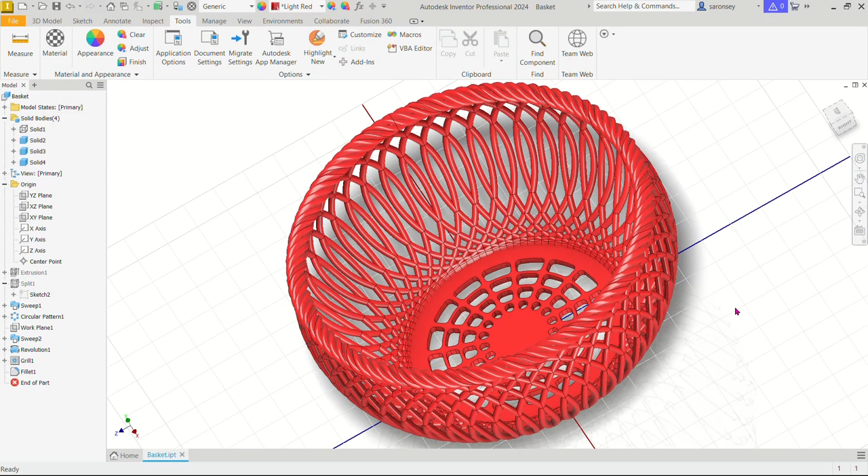Let's jump into today's exercise. Let's get a worksheet to begin. New, and then under parts, create 2D and 3D objects, we will select the standard millimeter IPT template under the metric template because this is more like a part, and create.

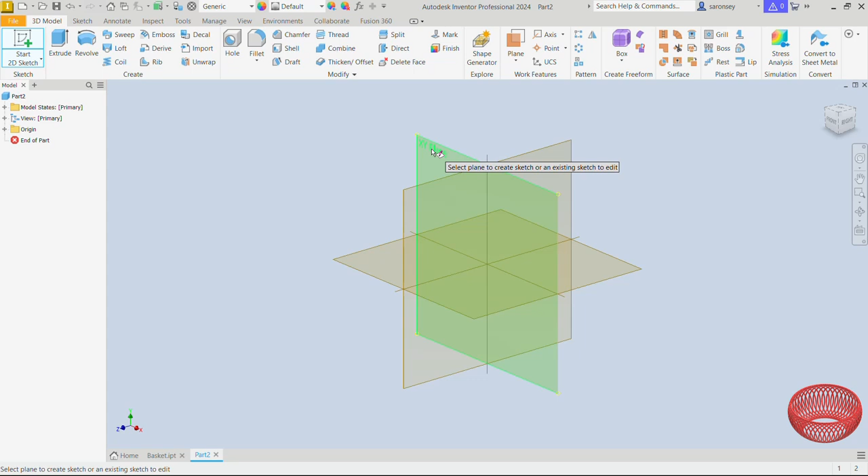Now we pick the 2D sketch command. Let's create the sketch on the XY plane. Let's pick the circle command after that, bring that to the origin and draw a circle. We will dimension this straight away, and so the diameter of this circle is 100. Type that and press enter. Double click the scroll mouse button to get your work in focus.

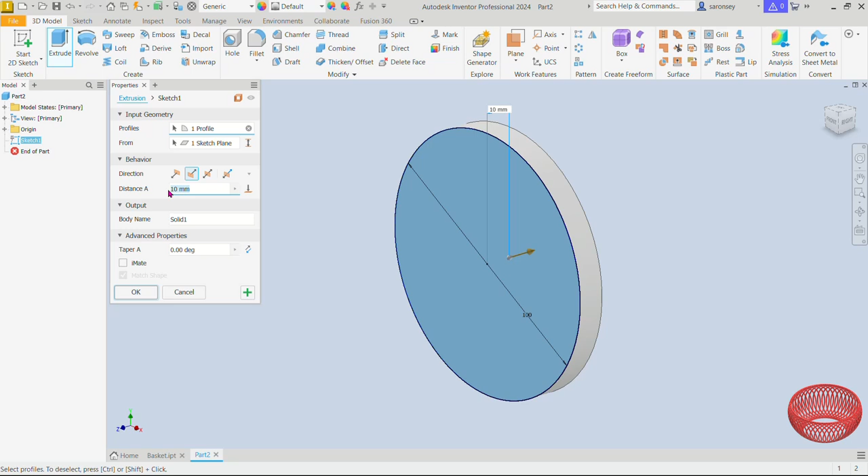Now we can finish the sketch. Let's extrude now. The profile has been correctly selected since there is just one closed profile. The direction of extrusion is what we'll change here to the flipped direction, and change the distance from 10 to 200. The preview is fine, so we can OK. Now let me drag this in position and double click the scroll mouse button.

Let's look for a plane to work on now. So we open up the default planes and then pick the YZ plane and create a sketch on it by clicking on this icon. You can pan to the left to get your work in focus. But we don't see the plane, it is hidden inside this body, so we choose the option that says slice graphics.

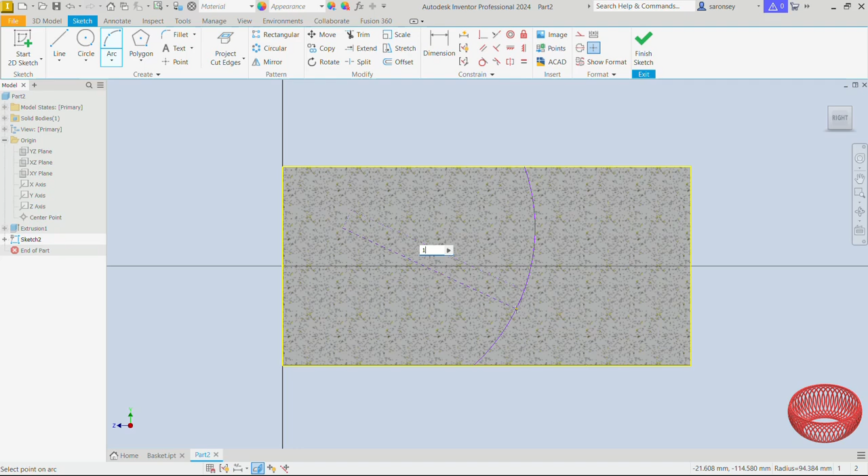Now let's project. So the project geometry command, drop it down and choose the option that says project cut edges. Now we will pick the arc command. Let's draw an arc anywhere here from this horizontal line to this horizontal line as well, making sure you slant it a little. We will give that a radius of 150.

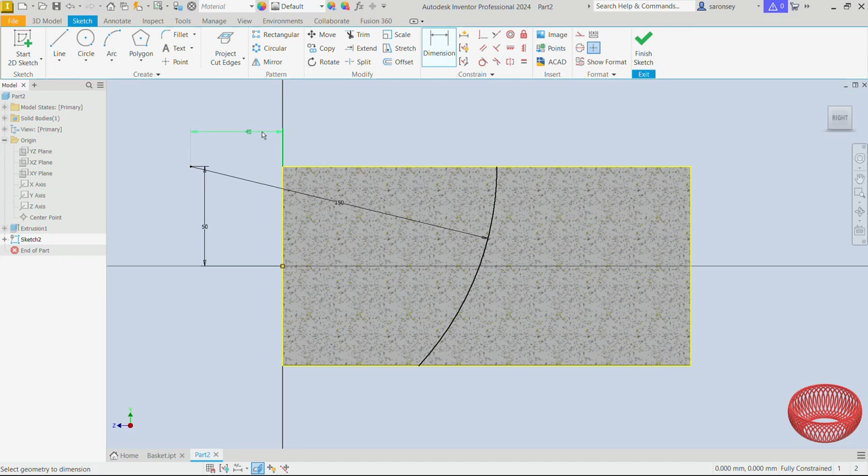You can type that straight away and enter. Now we can dimension. The distance between the point here that makes the radius of the arc and the origin is 50. And then also between that same point and this vertical line is 45. Press enter and then finish the sketch.

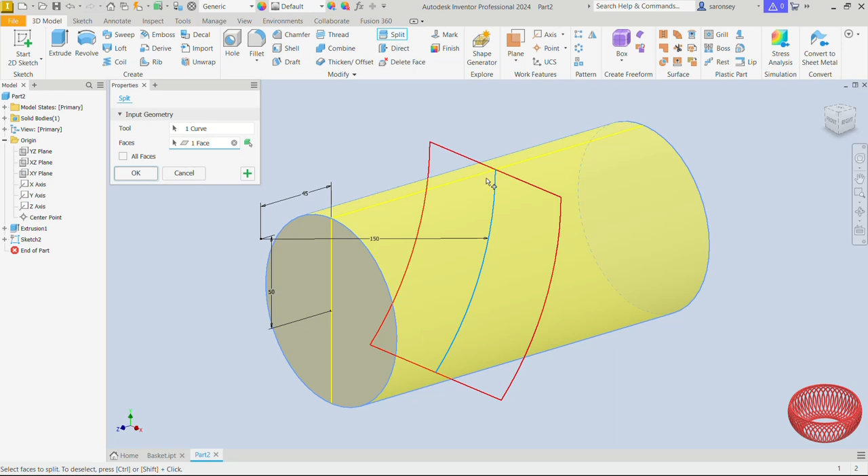Now we would use the split command. There it is under the modify group, it says split, let's select that. Now we need a splitting tool, that is the arc we drew, so let's look for it here. There it is, I'll click on that. And then the face I also want to split along is going to be this extrusion I did. I see a preview right here, which is fine, so we can OK.

Now let's introduce the YZ plane again, there it is, and create a sketch on that. Let me choose the slice graphics option and even project, so drop down the project cut edges here and choose the project geometry command. The arc I created, there it is here, I'll click on that. You can right click and then OK.

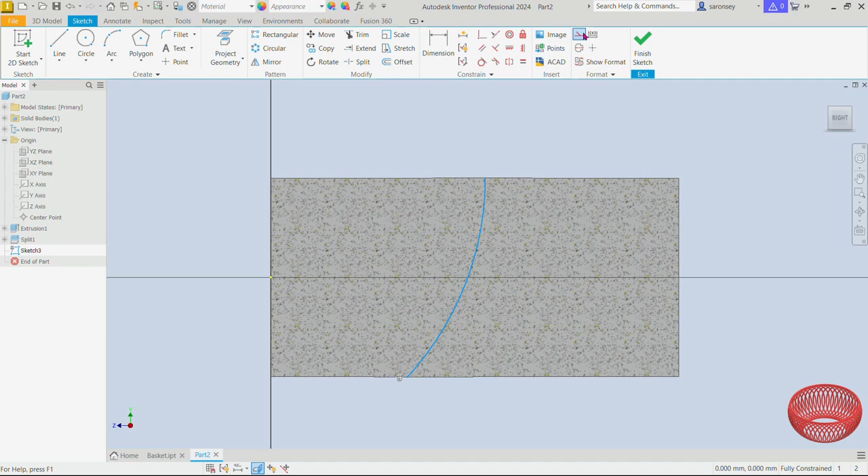Now let's select this arc and make it constructional. We will then pick the circle command. Let's draw a circle right here at the point where we began drawing the arc. The diameter of this circle is 4, and we would enter that. Now we can finish the sketch.

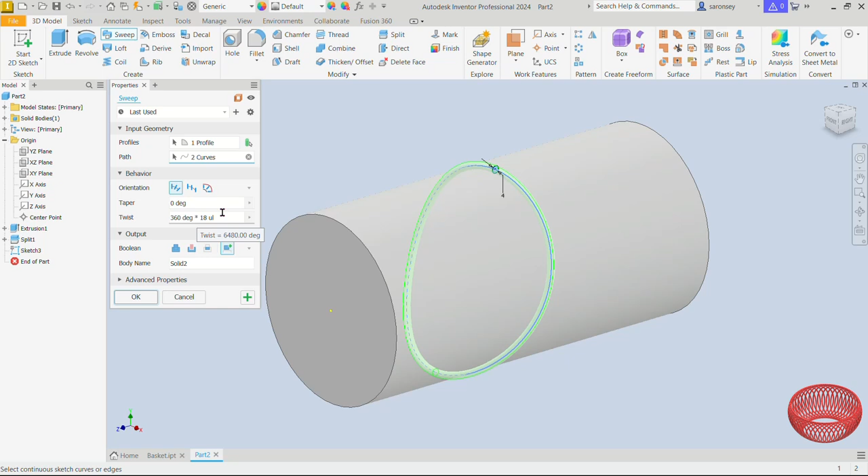We will then use the sweep command. The profile to sweep has been correctly selected. We have to pick the path now, which is going to be this path and then that one. Choose the boolean and make sure you have it at the last one that says new solid. For the twist, it can be 360 by 18. It doesn't make any difference anyway, but you can keep it as it is here, and we would OK.

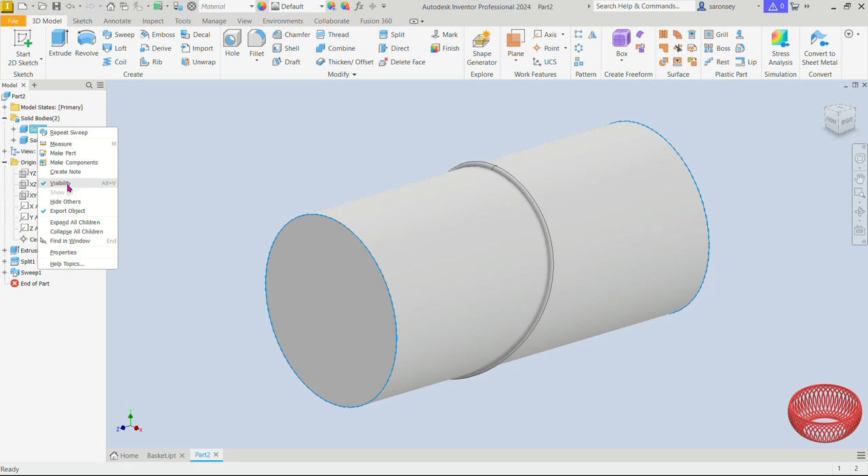Okay, so we needed this extrusion, the very first one we did, just so we could create this sweep profile, and so we can hide it now. Let's look for it here under solid bodies, just open that up. We see the solid body 1 and the solid body 2. So for the solid body 1, just click on it, right click and turn off the visibility. Now we have just the solid body 2.

From here, we would create a circular pattern. Let's pick that command up here and choose the second option that says pattern solid, because it is a solid we want to pattern.

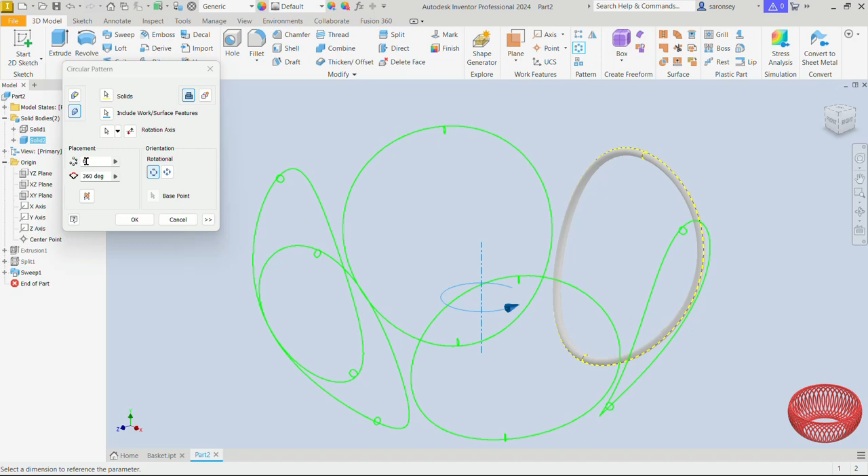The rotational axis, we can drop down this option and choose the Y-axis. We see a preview of that, but that is just 6 of that body. We want about 49 of them, so you type that in here. We can see a preview of that.

The occurrence angle is going to be 360 degrees, which is fine. You can OK this, but it may take a little while, so be patient with it. Okay, so there we have it, neatly done.

The main body of this basket is done. This is solid body 2. We want to hide this solid body so we can continue and create the top part.

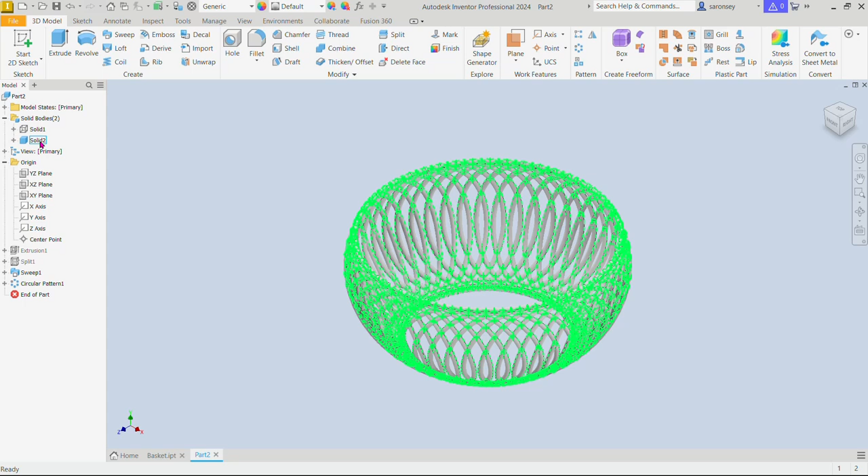Now let's look for solid body 2 - the first one was the extrusion we did, so this is solid body 2. Click on it, right click, and turn off visibility so we have nothing in here.

Now let's open up this split. Click on the plus sign next to it for the Sketch2. Right click on that and let's turn on the visibility. Okay, now we want to place a plane, so we pick the plane command.

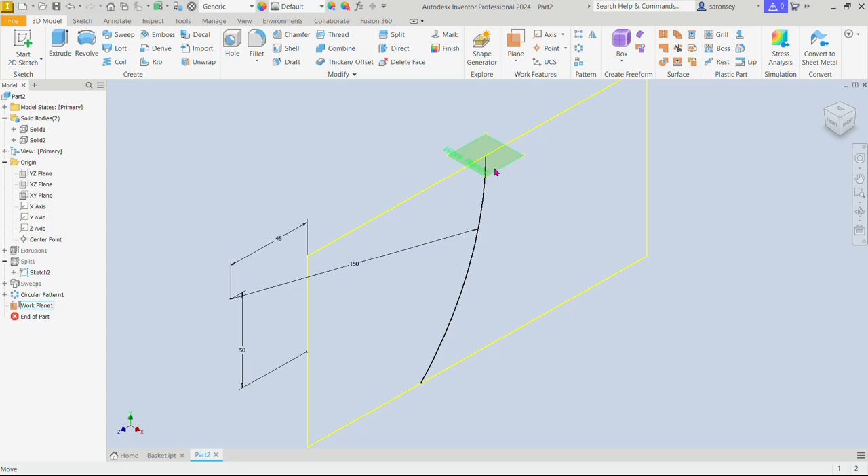The plane is with reference to this very arc, and then we will click on this point. Now let's choose this plane we just placed and create a sketch on that plane. Let me get the isometric view.

Now we want to project a point onto that plane, so pick the project geometry command. Let's project this very point right here. We see it in green. Now we want to pick the circle command.

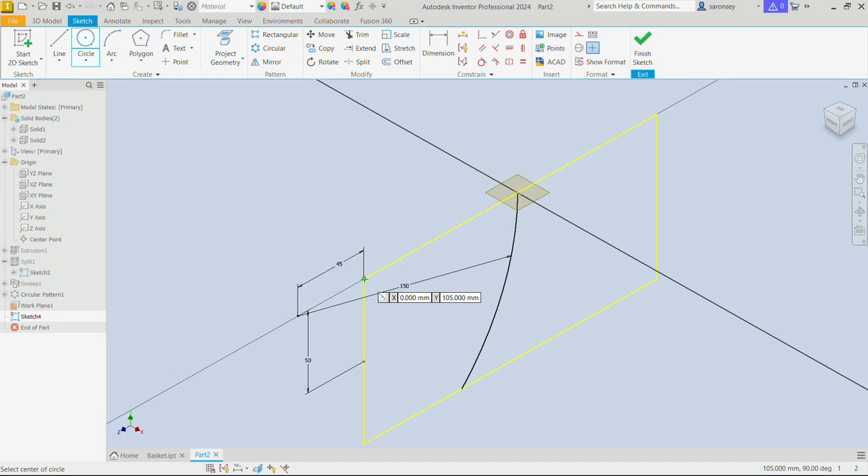Let's begin to draw a circle from this point here. You know you are there when it turns green, so just click and drag and then lock onto the point we introduced onto that plane. Let's click - you can now right click and then OK.

For this plane, let's click on that and then we'll turn off the visibility. Now we can finish this sketch.

Let's introduce another plane again into the YZ plane, and create a sketch on that. But we also want to project this point onto the YZ plane we just introduced, so I will click there. There we see it right here, very little.

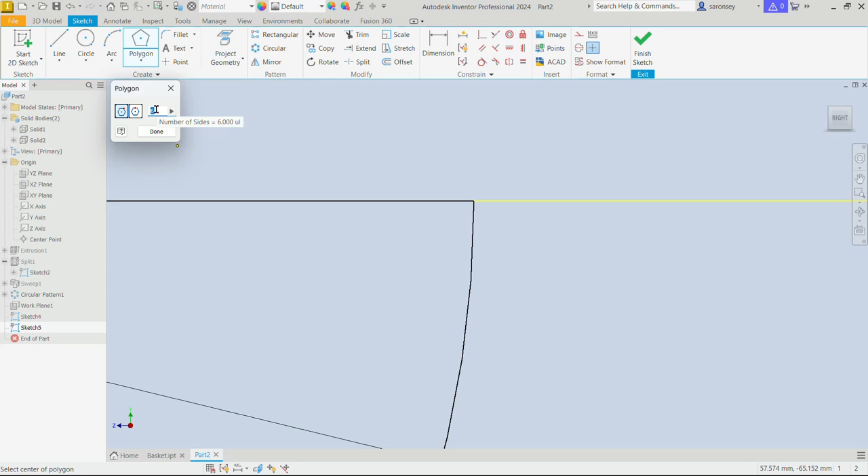Now let's pick the polygon, which is under the rectangle. If you have rectangle here, that's fine - just come down and choose polygon. We want the polygon to be inscribed and the size to be 6-sided, so just type that in here. From this point, let's draw a polygon.

Great, now we will dimension this polygon. The distance between this point here and this line is 7. Let me zoom in a little, and then we would make horizontal.

Just pick the horizontal constraints command. Depending on this orientation, we have to pick that and apply it to this line to make it horizontal. You can right click and then OK.

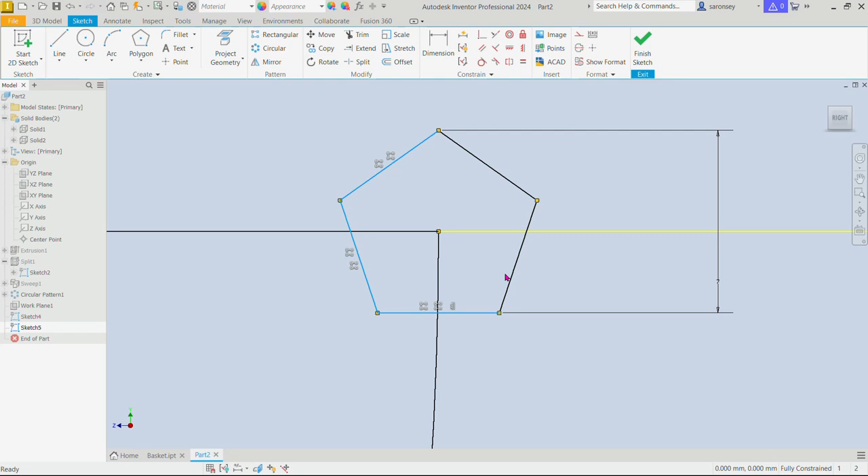Now let's select this polygon - click on the first line, hold down the control key, and select all other 4 lines that make up the polygon and make them constructional.

Now we'll pick the circle command. From this very point here, let's draw a circle of diameter 4.5. Let's enter that, and we also want to pattern this circle. Before that, just right click and then OK.

Now let's create a circular pattern of this circle, so we will pick the circular pattern command up here. The geometry is going to be the circle we just drew, and the axis we want it to go around - we can use this point here, but we see a number of previews.

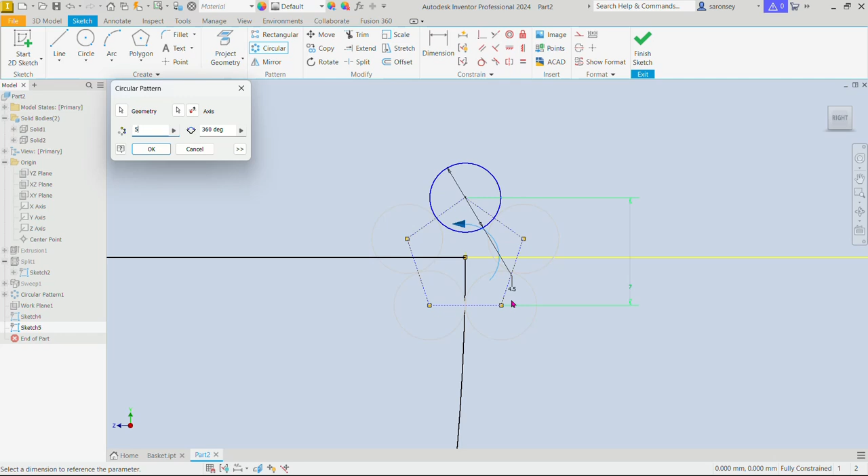There are about 6 of them, which isn't what we want. We want just 5, so that each one is at the 5 corners of the polygon. The angle it should go around, 360, is fine, and so we can OK.

Now this sketch is done. Let's finish it, and we would use the sweep command again, so sweep. Let's select the profiles we want to sweep.

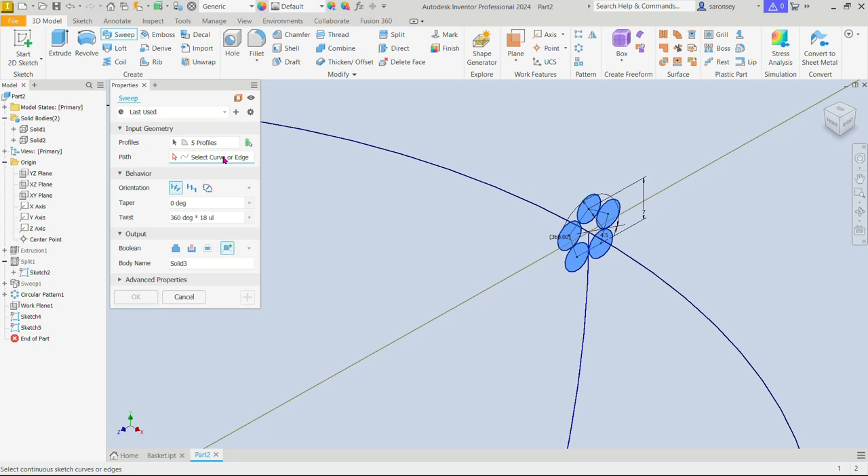It's going to be the circle, all 5 circles we created the circular pattern for. And then for the path it should go around is going to be the circle we drew. This may take a little while, just hold on. The taper is going to be 0.

The twist, make sure you keep it at 360 multiplied by 18. And then for the boolean, also let's make that a new body, so you pick the last option here.

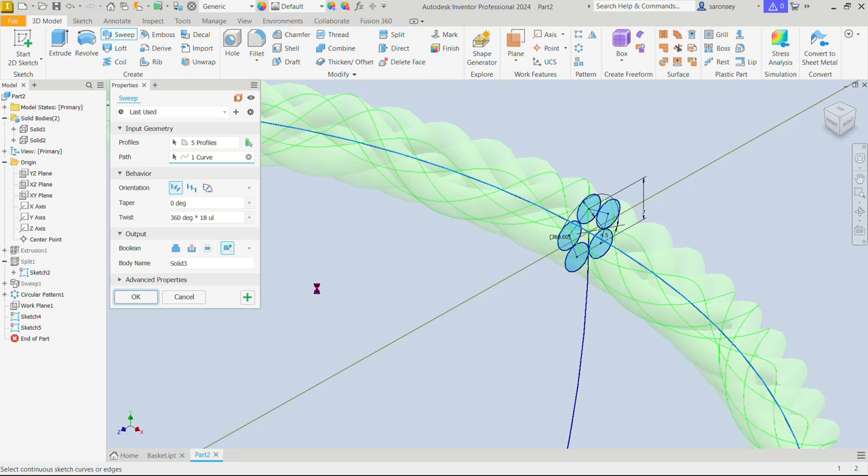That is going to make it solid body 3. And we can OK - just have some patience, this may take a little while.

Okay, that has been done. Double click the scroll mouse button. Awesome.

Now let me give you a clear picture of what we've done. We can turn back on the visibility of the solid body 2. Okay, so there it is. We've created these two, but they are separate bodies.

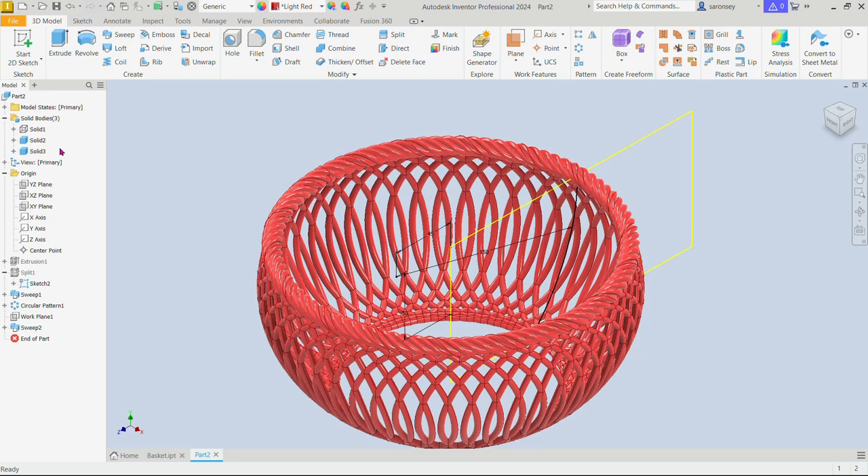Let's go ahead and create the base. For that, I'll turn off the visibility of the solid body 2 and also do the same for the solid body 3 we just created. Now let's get a plane to work on. So the YZ plane, I would create a sketch on that. Let me pan into the middle.

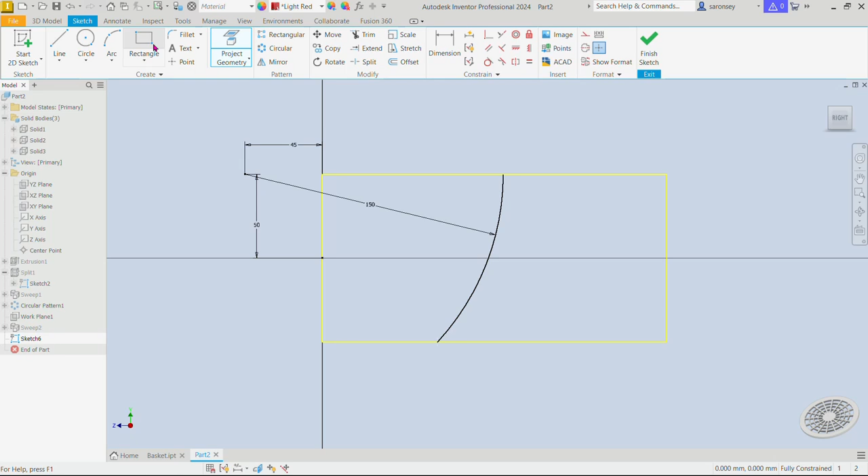Now let's project this very point here onto the plane we just introduced. I would pick the rectangle command. From that point, let me draw a rectangle and dimension it. The distance between these two horizontal lines that form the rectangle is 4. I would enter that, and then apply a vertical relationship between this point and this point here that fully constrains the rectangle. You can right click and then OK.

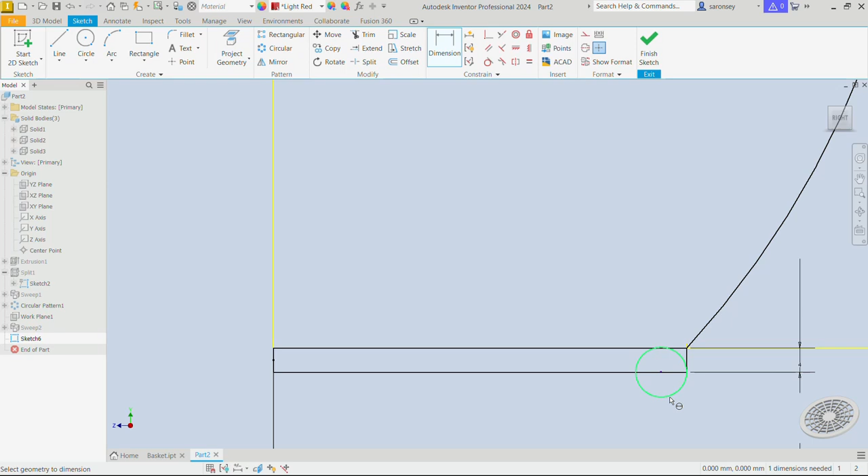Now we would pick the circle command. Let's draw a circle from this point and lock it here, but we would also dimension the diameter of this circle as 4. All right, now let's trim.

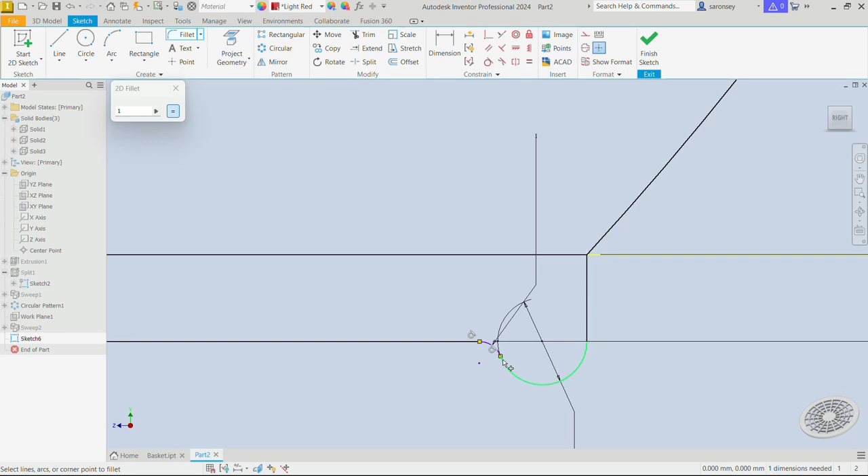With the trim command, we want to take off this part and also this part as well, and apply a fillet. The fillet radius is going to be 1 between this vertical line and the half circle. Let's close this now and also apply a coincident relationship between this line and this point here. That fully constrains that part of the sketch. So we can finish it.

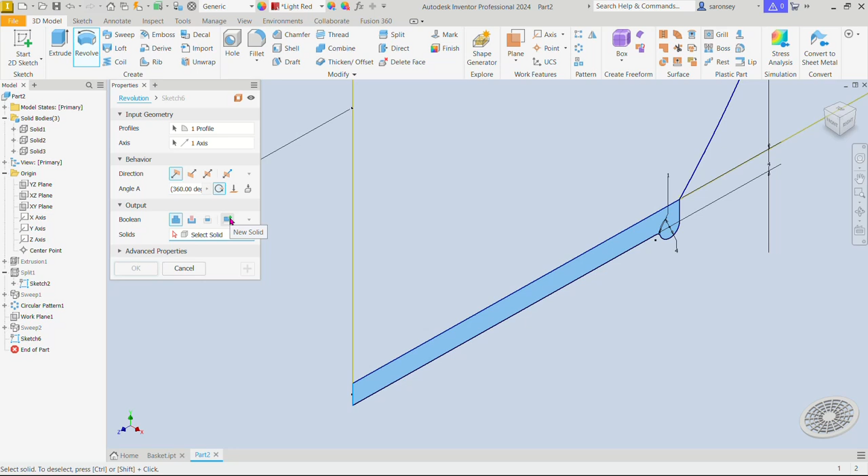What we want to do is revolve. With the revolve command, the profile is going to be this one. And for the axis we want to go around, it is going to be this axis. Let's also make the boolean a new solid body, and we see a preview, so we click OK.

Okay, I changed the color to red. Let me drop this down and even do the default color. We will change the color totally after we are done, so do the clear override. Okay.

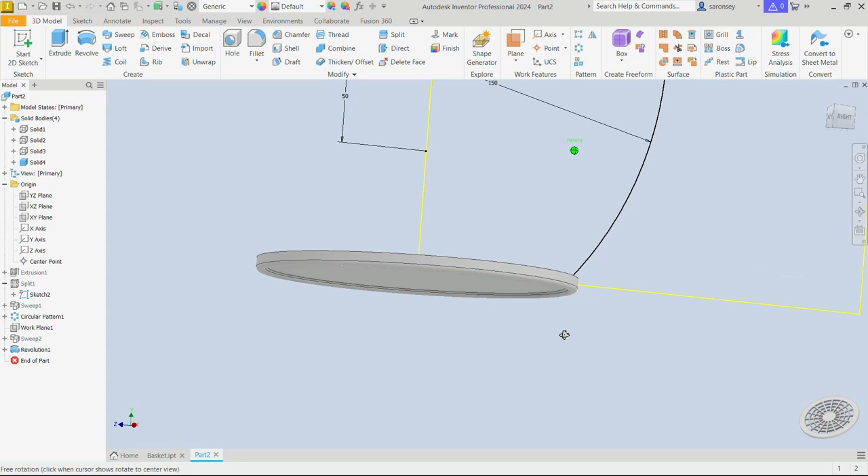So this is how it's going to look like. All right, let me get the isometric view. We are done with the use of this sketch, so let's look for that. It is here under split. You open that up, look for sketch 2, click on it, right click, and then you can turn off the visibility. Now we deal with this solid body.

So let's select this face and create a sketch on it. Now we want to pick the circle command and bring that to the origin. We'll click and drag and draw a circle of diameter 30, and enter that.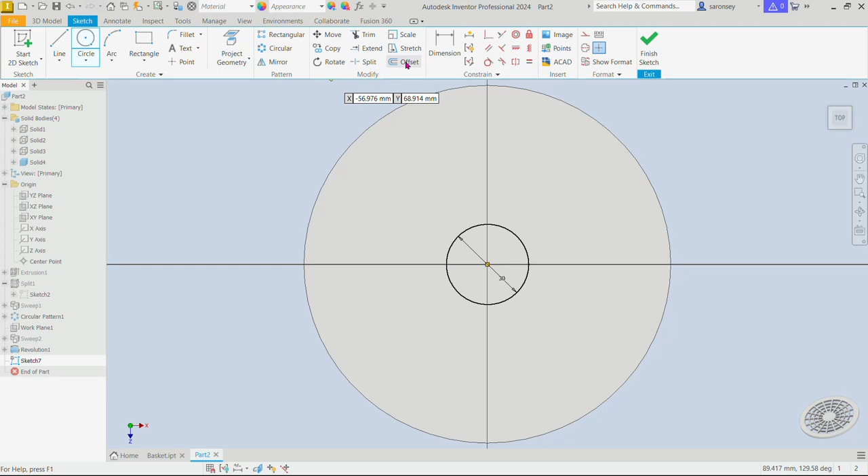Now we want to offset. With the offset command, let's offset the circle we drew to a distance of 10. We would also offset this second circle to a distance of 10. Let's do that a third time, and then even another one finally.

And enter. Now we pick the line command. Let's draw a line to divide these circles into 2, from this point up until this point here. You can right click and then OK. But let me click on this line and drag it a little. Now let's apply the coincident relationship and look for the middle of this line. There it is here, so click and click on the origin.

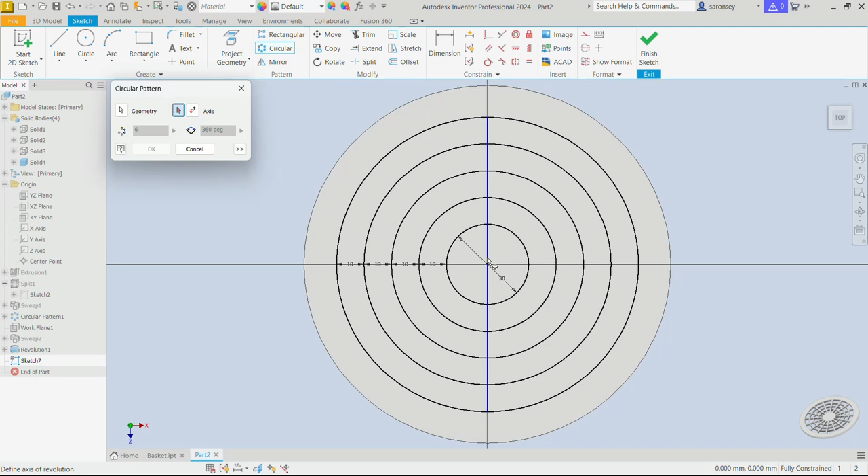Okay, now we want to pattern this line. Before that, just right click and then OK. So we can pattern this line. With the circular pattern command, the geometry is going to be the line, and the axis we want to go around is going to be this one. The occurrences or count, we want 8 of them. The angle is going to be 157.5. So that is the preview. It looks fine, we can OK.

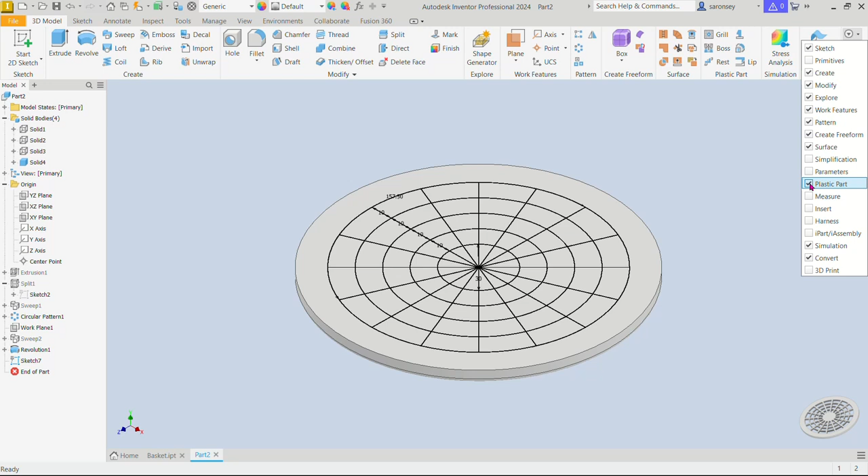Now we can finish this sketch and use one of the commands I have never used here before. It is under the plastic part, called the grill. If you don't have this section, just drop down this option right here and look for the one that says plastic part. You can just check it and now you will see it. So now we choose the grill command.

Here under the grill, we have a number of tabs. But first, let's define what the grill is used for. The grill command here in Autodesk Inventor is a specialized feature used in plastic parts design environments to create usually vented openings with structural supports like ribs and spars. It is commonly used in plastic casing, ventilation covers, and electronic enclosures that allow for airflow while maintaining the strength of the part. So here we are supposed to define a number of options.

These are the tabs: we have the boundary, the island, the rib, the spar, and the draft. We would use these first four. Now let's go through them one after the other.

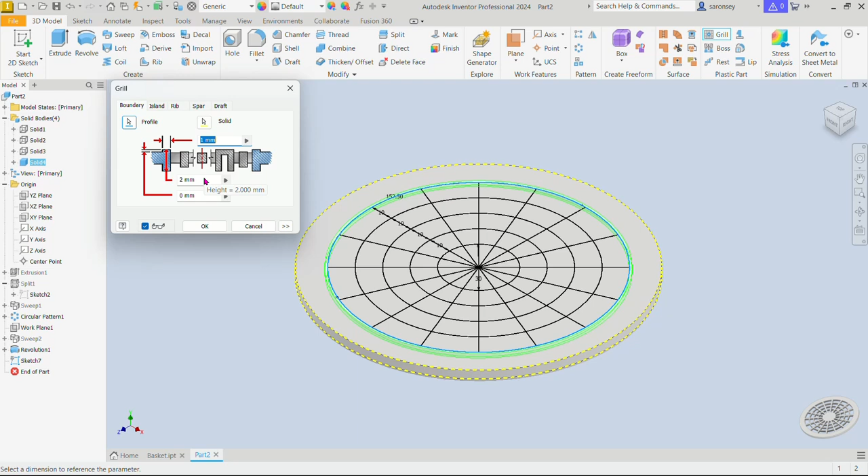Let's define the boundary. The boundary defines the outer shape of the grill. So now let's select the outer shape, that is going to be this very one, I'll click on that. But we also have to define that with the thickness and the height. We want the thickness of this to be 2 and the height we are going to keep at 4. Now we move to the island.

This island also allows closed regions inside the boundary, that is the solid area without an opening. So we are going to pick that profile also, it is going to be this very one.

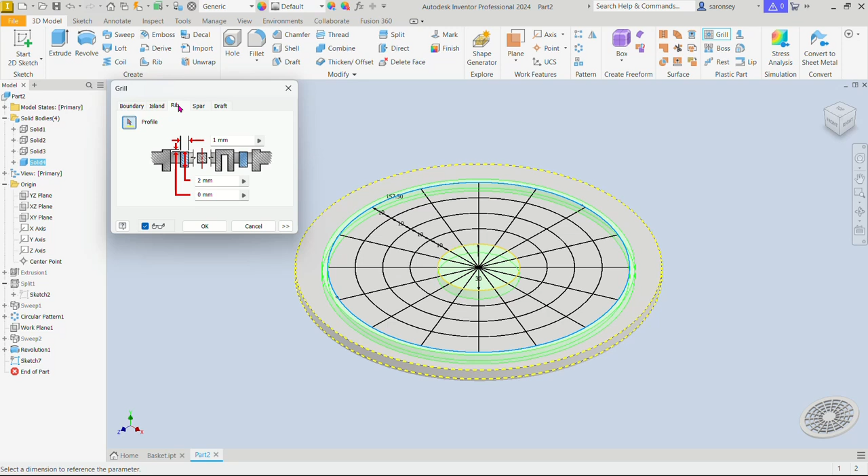Now we move to the rib. The rib is the structural support that runs across the grill openings in one direction. The ribs are going to be all these lines we place, so just take your time and select all of them. Okay, I think we have all of them selected. Now let's define that with a thickness of 3, and for the height also we'll give that 4.

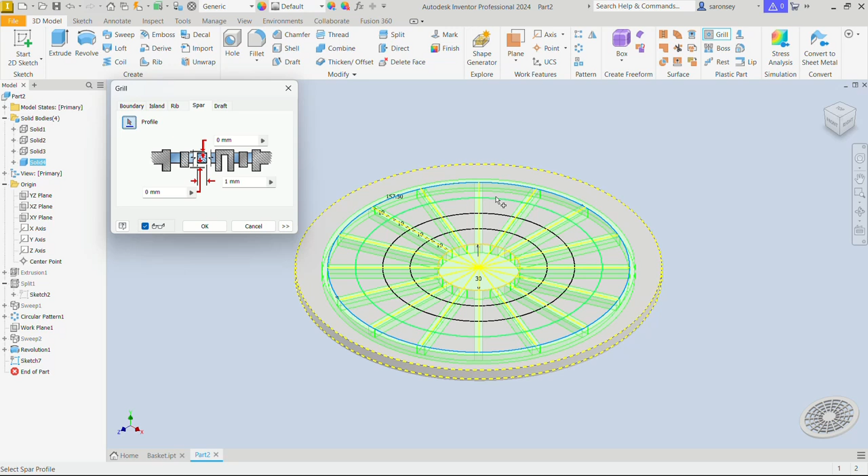Now we move to the spar. The spars are additional support ribs that run perpendicular to the main ribs. So we can also select that, those are going to be these circles, so we'll select them. And we want to define that with a thickness of 2. All right, that is it. We see a preview, it looks good, and so we can okay.

Awesome, that has been neatly done. I find this tool such a great tool.

Next we are going to apply fillet to a number of corners, about 256 of them. This is how we go about it: the fillet command. Now let me change the fillet radius to 2.5, and then you should pick the option here, which is... yes, this very one, set selection priority to feature, so we'll click on that.

Let me turn this off, and then you can now pick the grill, so you can select that very feature. In all, you should get about 256 edges, and so we okay.

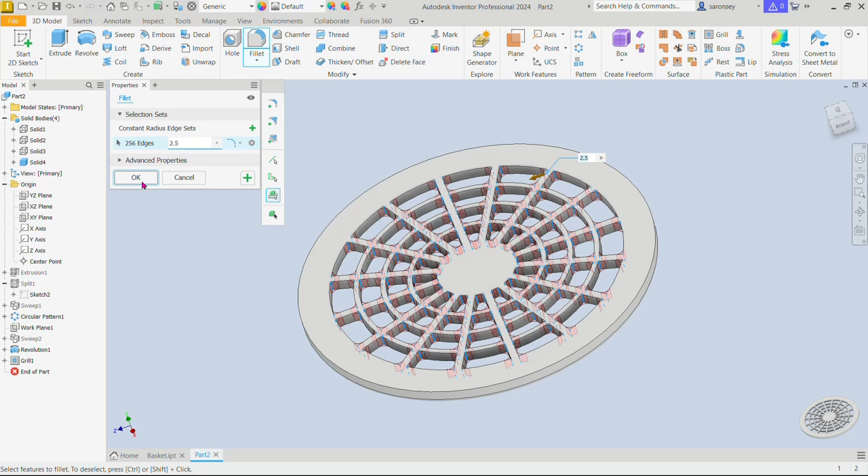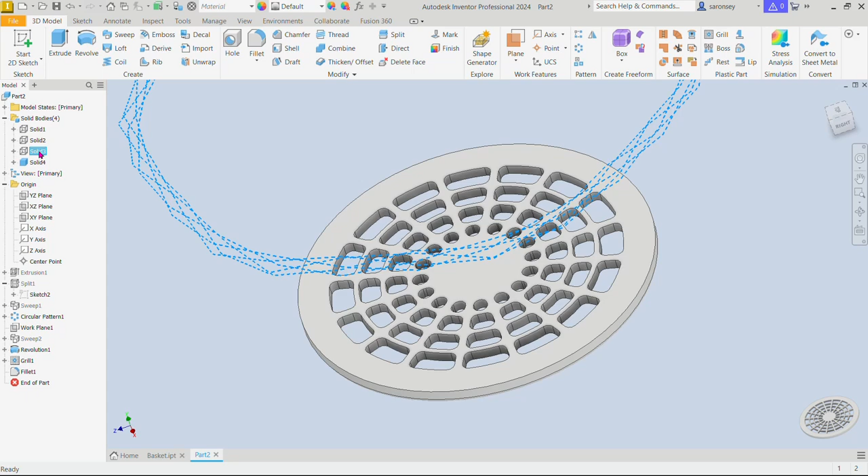That may take a little while depending on the quality of your machine. Mine has very low quality, so it takes about 30 to 45 seconds. Okay, so our sketch is done, all our solid bodies. So let's turn them back on. For solid body 3, we'll turn on the visibility. Okay, for solid body 2 also, we'll turn on the visibility.

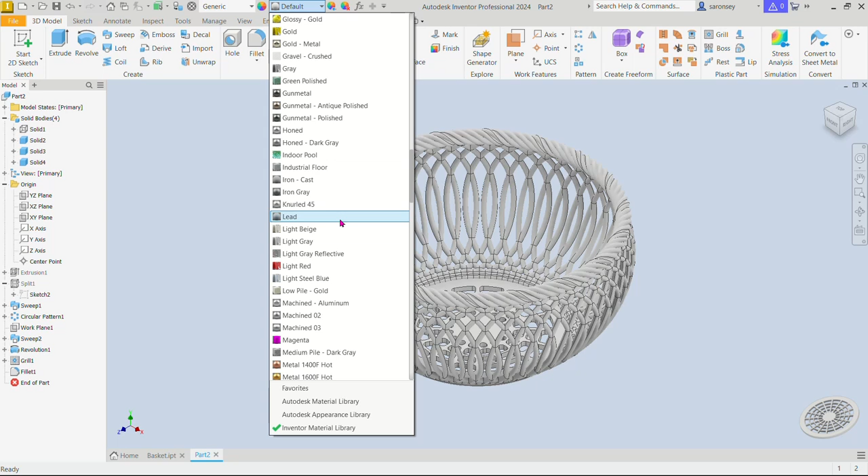Great, now this is what you should have. Very easy and simple. Let's even change the appearance here. You can do any color of your choice, I'm going to do the light red. You can just type L to move to the L column, so light red here.

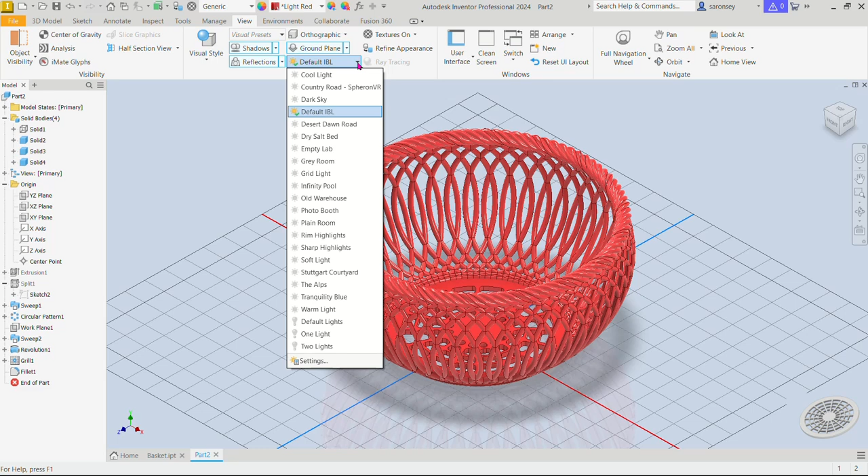And we can do our basic rendering. On the view and the visual style, it should be kept at shaded with edges. We can apply some shadows, some reflections, even a ground plane, and you can change the lighting effect to photo booth if you want. I also usually change the color of the background to presentation mode and apply. Now we can close it.

Let's inspect one last time. Okay, and so that is going to be it for this tutorial.